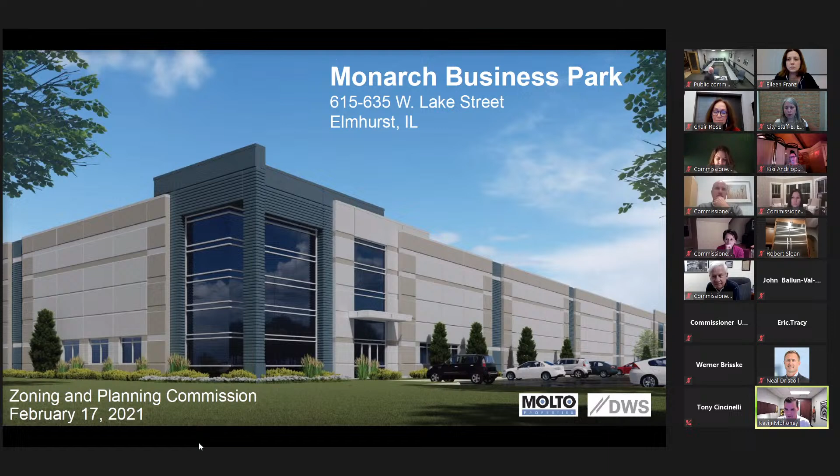All right, I know some of this is probably refreshed and you guys know the site pretty well, but just a quick overview of existing site conditions. This site is roughly 26 acres. It's right at the corner of Lake and Grand, currently zoned I-1 restricted industrial. It's really at the doorstep of the city's primary industrial district. Presently, it's home to a Caterpillar sales and service center.

It's owned by a company out of Iowa called Altorfer. Back in 2018, Altorfer announced plans to relocate this Elmhurst operation into 4 separate facilities in the greater metro area, and that's really what unlocked the development potential for this site. We've owned the property since acquiring it back in January of 2019. Since then, we've been leasing these facilities back to Altorfer as they finalize their relocation, which should be complete within the next 45 days or so.

Once they do vacate the site, we will commence demo of the existing facilities. We're also going to be performing a significant environmental cleanup to remove and/or clean some contaminated soils on site. All that is going to be under the guidance of a formal remediation plan that we've already had approved by the IEPA. Just a couple of general notes on timing: we would expect the vertical redevelopment to commence sometime later this spring, with a target completion of the development end of 2021 or early part of 2022.

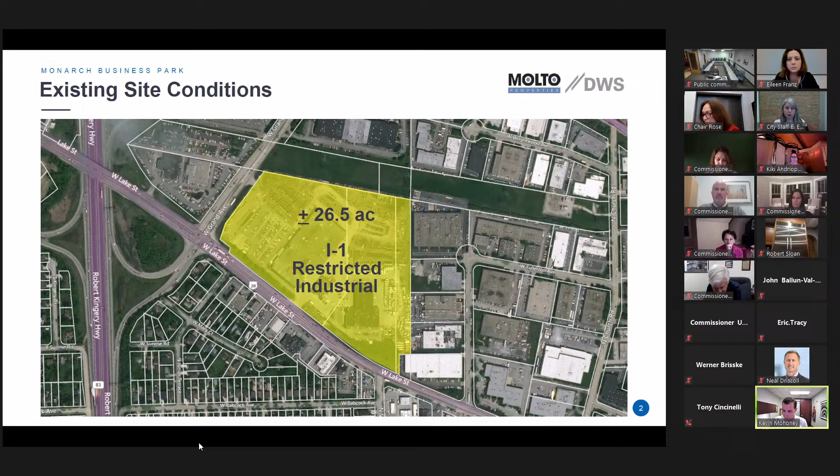Anytime we're looking at development, I think it's always helpful to view it within the context of the current market conditions. The reality is that we have a very healthy industrial market. Throughout this pandemic, industrial has proven to be a very resilient and very stable property type. The trends accelerated by the pandemic have only further strengthened our industry. From a macro level, Chicago in 2020 recorded a record number of new leases. When you look at the 1.3 billion square foot Chicago market, you've got a current vacancy rate of 6.7%, which is very healthy. As you drill further into the Chicago submarkets, areas like we have here in Elmhurst continue to be premier industrial locations.

They're highly attractive to tenants. You've got great access to interstates, proximity to the airport, and the relative tax benefits of a DuPage County address. Now, the challenge is that while these are highly desirable locations, they're also highly constrained with respect to new supply. You've got a lot of barriers to entry to developing in these areas.

When you specifically look at your community in Elmhurst, as of the end of last year, your vacancy rate for industrial properties was right about 4%. That would, without a doubt, place you as one of the top performing municipalities in all of Chicago. It's an impressive number, but it's also reflective of severe supply constraints. Ultimately, a lack of modern facilities is going to greatly inhibit the city's ability to attract, retain, and grow quality corporate tenants in the future. Our hope and belief is that this project will address some of those unmet needs and ultimately make the city more competitive in attracting new companies.

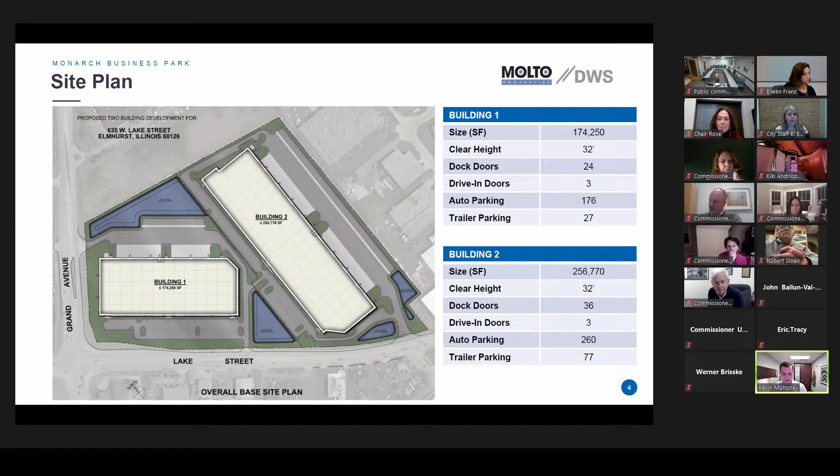Moving on to traffic and circulation, this is something we always spend a lot of time on during the design stage. It's always important to municipalities, and it's also important for good design because the ingress, egress, and circulation on these sites is meaningful to tenants.

When we looked at this site, we focused on three things we typically apply to most sites: limiting negative externalities to the existing roadway system, designing a layout that provides good ingress and egress to the site that's attractive to users especially in a spec scenario like this, and providing good on-site circulation that separates both auto and truck traffic, limiting potential conflicts between the two.

As we've talked about, this is a big site, so you've got a lot of design flexibility. But when it comes to access, we have a few more constraints we're dealing with — two different jurisdictions on the traffic side. Grand Avenue is under the jurisdiction of DuDOT, and Lake Street is under IDOT. So the access points you see here are reflective of our conversations, input, and ultimately approval from both of those entities.

Starting at the northwest corner, access point 1 along Grand. At present this is currently a full access point. As part of this proposed project, we'll be downgrading this to a three-quarter access point per DuDOT. Essentially this will allow a right into the site, a right out of the site, and a left into the site, but no left out of the site. As you can see, it essentially leads into the truck court, so this would primarily be the ingress point for trucks entering building 1.

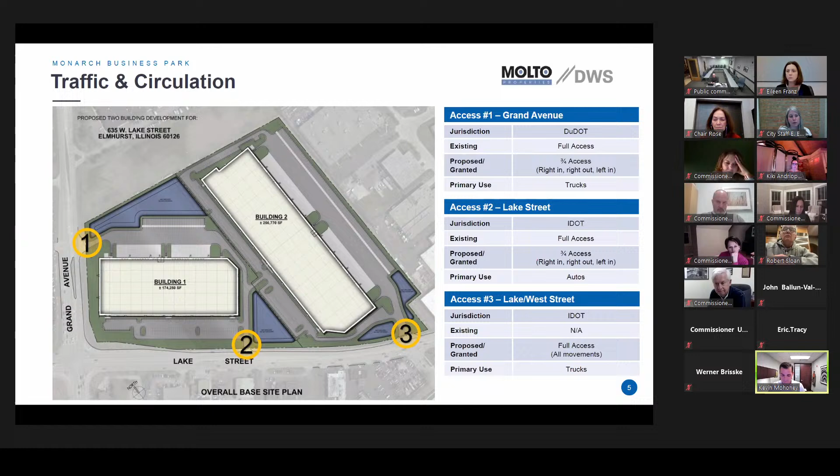A few quick notes on building and construction materials. These are modern industrial buildings, precast concrete, made of steel. You've got future office areas, as we talked about, on both corners, as well as a future center entrance. That's where you have more of the architectural details, with a higher image class entryway. We're incorporating a number of different architectural elements into these buildings.

That includes reveals in the precast. We're also doing some variation in paint scheme, all to make the buildings a little more architecturally unique and essentially to break them up.

We are also planning extensive landscaping throughout the site. That's certainly something we like to focus on, especially in a higher visibility site like this. We will be focusing those efforts along the Grand and Lake frontage. In general, I know the city doesn't have design guidelines presently, but we're pretty confident these buildings will be reflective of any future standards the city would implement.

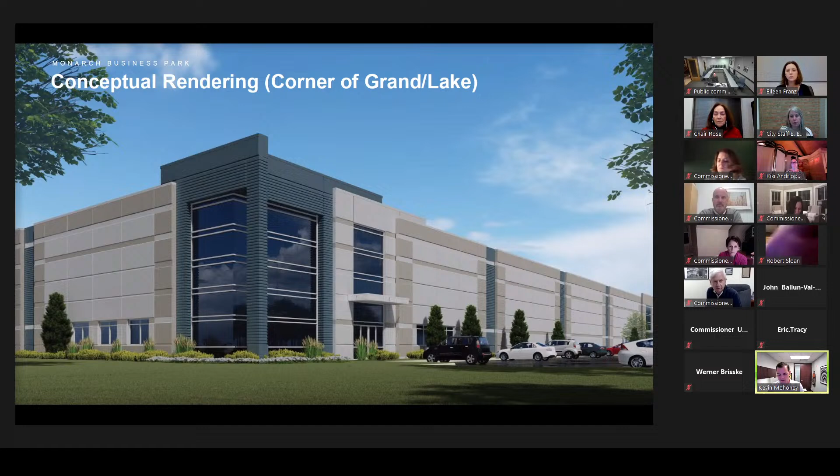In terms of loading, it's a standard mix of loading dock doors as well as drive-in doors. You can see we're incorporating a number of clerestory windows, which helps brighten up the warehouse space. It's something tenants consistently request, so we've started proactively putting these clerestory windows into our buildings.

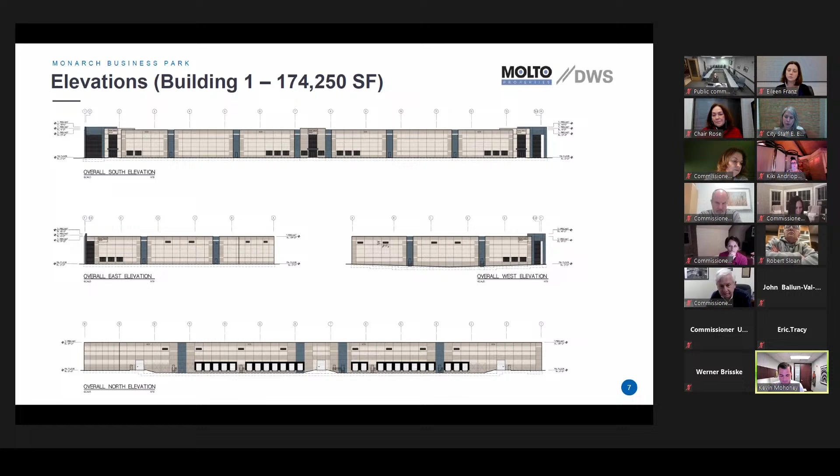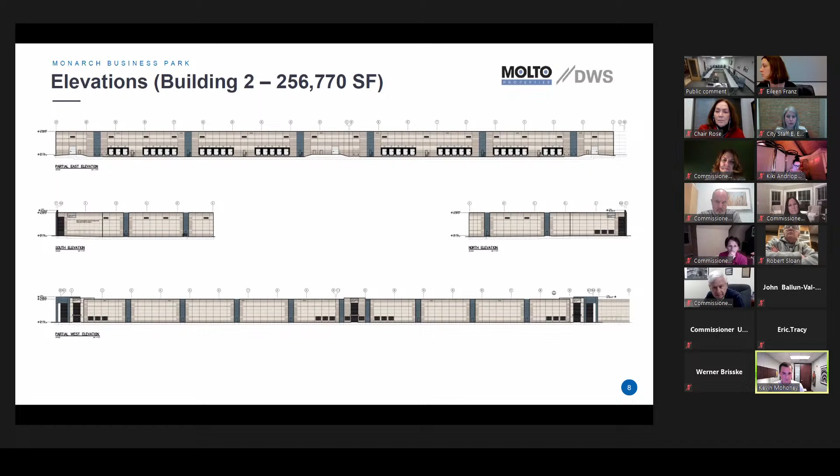In terms of standards of review, I know in our application we addressed each of these items. Thought it was worth touching on a few of these standards that we thought were most salient and important.

In terms of the conditional use standards, as it relates to the project's impact on surrounding property, what we're proposing here, as we discussed, is a modern business park. It's something that we believe is going to improve the existing streetscape, and we think ultimately it's going to encourage further redevelopment in the city's existing industrial district.

In terms of conformity with the city's comp plan, we believe it's consistent with a number of the key objectives in the comp plan, specifically as it relates to encouraging quality building design, creating economic prosperity for residents, and overall strengthening the city's industrial base.

And then finally, in terms of conformity to applicable regulations of the district, as was mentioned to lead off the meeting, we are not requesting any sort of site development allowances as part of this submittal.

And then moving over to the PUD standards, a few things worth highlighting. As we talked about traffic, we spent a lot of time designing this project to accommodate the safe movement of car, truck, and pedestrian traffic on site. We also have multiple points of ingress, egress for any sort of emergency vehicle access.

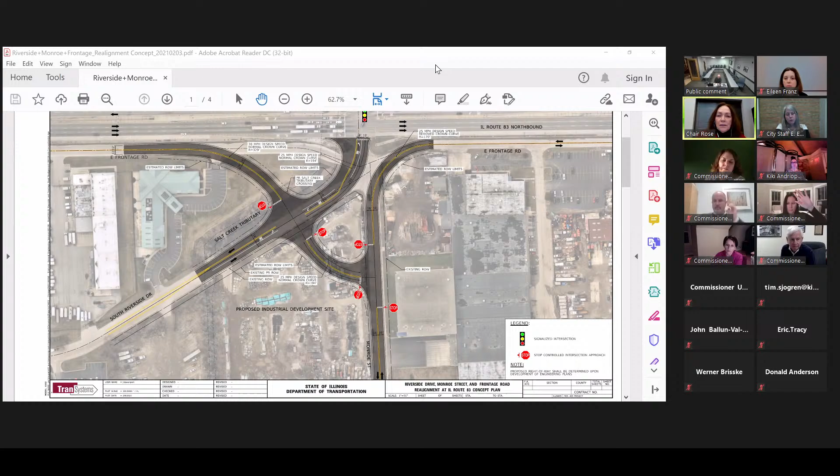I guess I just wanted to get some clarification on this conceptual plan and how it relates to what's being proposed tonight. Would there be any changes? It looks like a majority of what you're envisioning as a potential new interchange would be going through that detention basin, but it also seems like it might infringe on the footprint of what's being proposed in terms of the actual building. I do have an overlay of it with the building in place. It does not affect the building at all.

This is like the first time we met with this group. We said, hey, this is something we really want to do, and they worked with us on their design so that if there's ever a possibility to happen, it could happen. The only issue now is the stormwater detention. This area has been recently improved, and the FEMA flood elevations have changed recently, which has helped a lot, but there's still some stormwater detention issues—still some floodway and floodplain to the east, where before it was pretty much all floodplain and some floodway. So it's a matter of whether they can work out the engineering for the detention elsewhere, so this could just be open land for the future possibility. If not, then it's going to be a decision of whether we underground it at some point or do some kind of land swap to redo their detention if it can all work out.

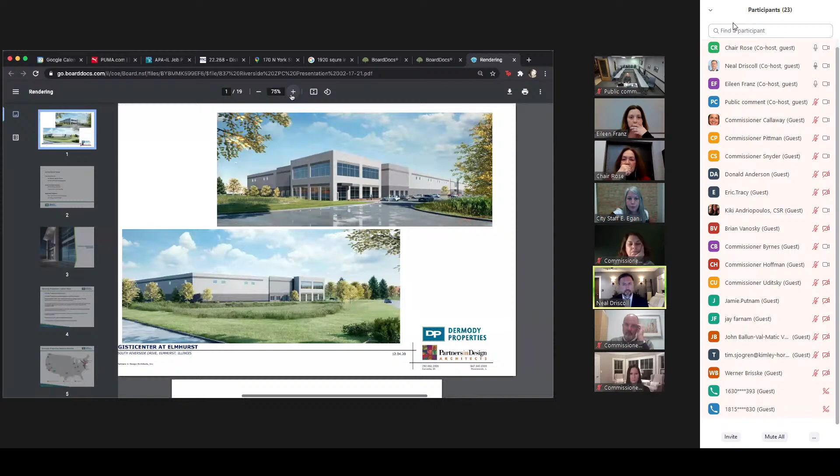We think this provides great benefit and opportunity for the city of Elmhurst as well. I won't go back and rehearse Kevin's really fantastic description of what's happening in industrial real estate in Chicago, but more specifically around the airport. I certainly agree with 100% of what he said. It's a great time to have opportunities like this to present to your community, particularly because I think there's so much residual value that Elmhurst will benefit from bringing these new buildings and therefore new companies into their community, just from the general patronage that all those employees create within Elmhurst.

Our first slide here is just two different rendering locations, just to give you a little bit of sense for what the quality of this future building will be. We at Dermody spent a lot of time really focused on the aesthetic component of this. We typically put a lot more glass on our buildings than others because, in our opinion, it elevates the image, but also that sense of ownership from our future tenant base. If you could flip the two, please.

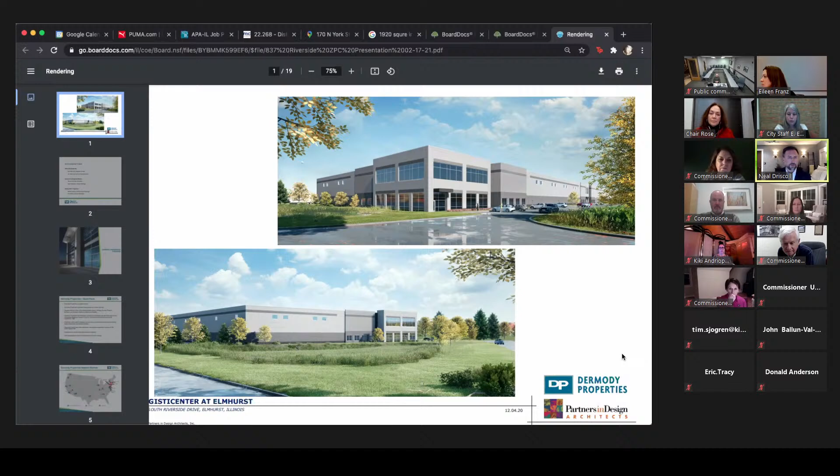Just to give a quick description of our project team. Again, my name is Neal Driscoll, and I'm the Midwest partner for Dermody. My senior project manager, Jim Nass, wasn't able to join us tonight because he's on a call for a project down in Reno. Our architectural partner is Partners in Design, Werner Brisske, who's on the call tonight. And from Kimley Horn, we have Jamie Putnam, Eric Tracy, as well as Tim Sjogren, all of whom were on the previous call. So just another parallel between the two, which is kind of fun, but certainly means they've got a good understanding of what's happening in Elmhurst.

If you jump forward again, please. Actually, maybe one more.

Just for a quick background on who Dermody Properties is as a company, we're a privately owned development company. We're actually based out of Reno, Nevada, but we've got headquarters here in Chicago, where I sit, where our president as well as our chief investment officer sit. We're essentially coast to coast and have a very robust development pipeline from the far northwest all the way through to the northeast. Next one, please.

There's just a description of all those markets that I mentioned, and then one more.

Here's just a quick graphic representation of some of the tenants that we either currently work with or have built buildings with in the past. A lot of household names that you all recognize, I'm sure.

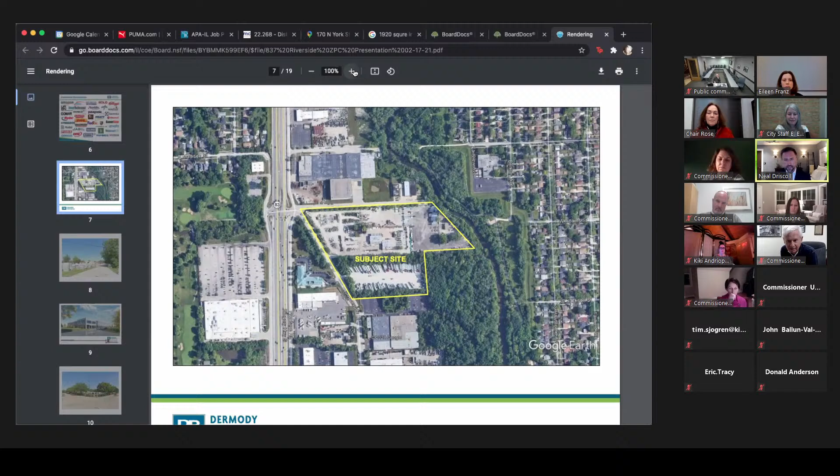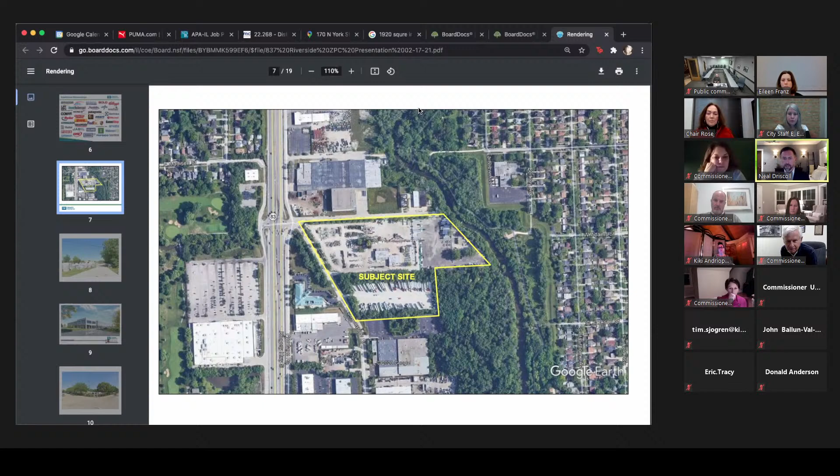I apologize for the clunkiness of not operating this myself. Here's an aerial of the subject site. It's actually bisected right where you see the word subject site by the creek that Mike referenced previously, and so it actually creates some pretty unique challenges as it relates to how you find a way to redevelop this site. Next one.

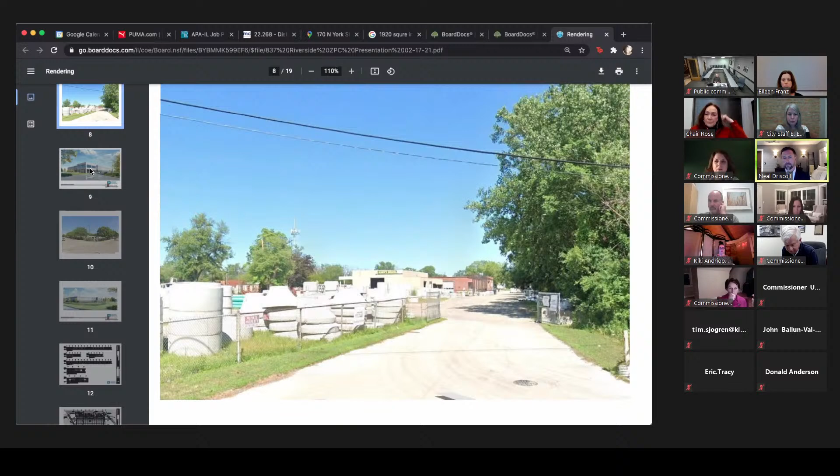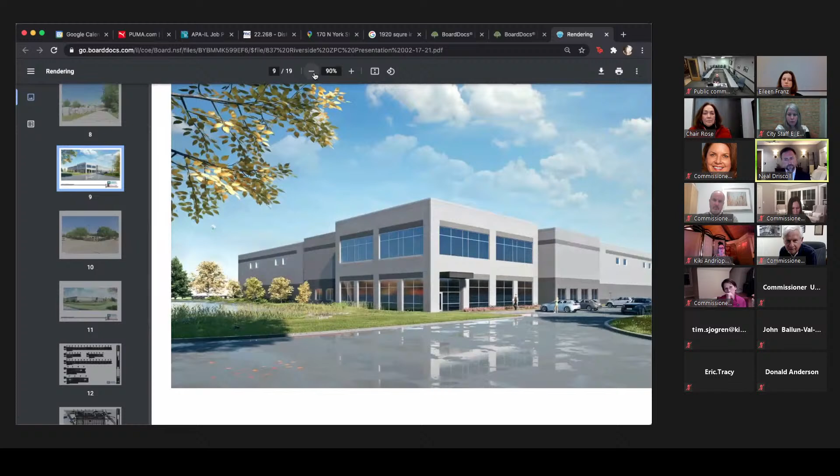Here's essentially a street side view of the current property. It's a concrete products sales location. There's also a handful of tenants who lease yard space on the current site. And if we flip to the next one, you'll see an elevation of that future view from Riverside Drive.

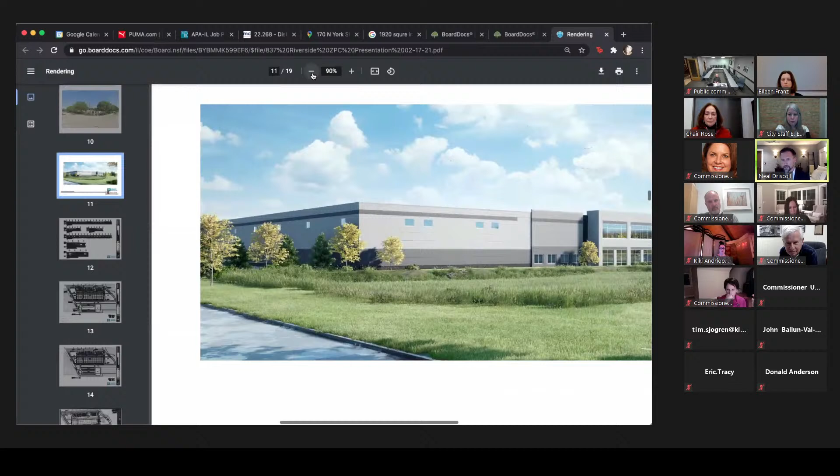The next one will show you what that rendering and elevation will look like in the future. This also shows the compensatory storage pond we were talking about previously. As Mike and Eileen both mentioned, this is something we created in the beginning when we talked about setting the building back far enough to help accommodate the alignment in the future. We've now, through communications, taken that a step further to suggest that not only will we commit to conveying this land over to Elmhurst to make this reconfiguration, but we will likely relocate some of that compensatory storage now so that we all can save the short and long-term cost of that relocation when the road alignment comes through.

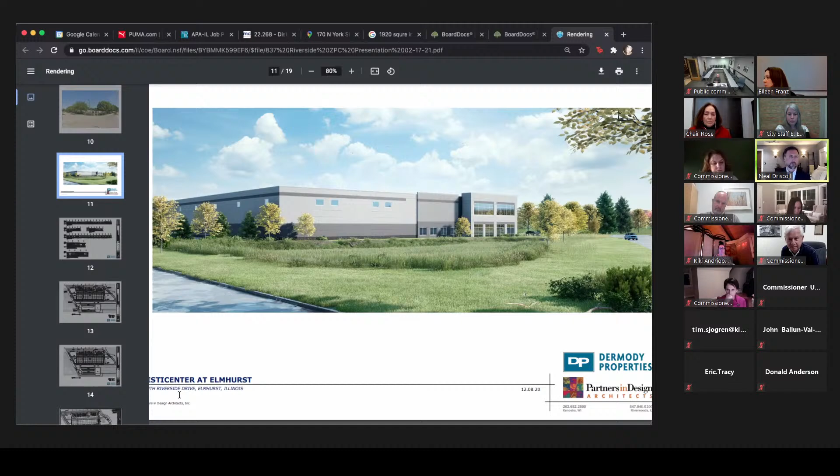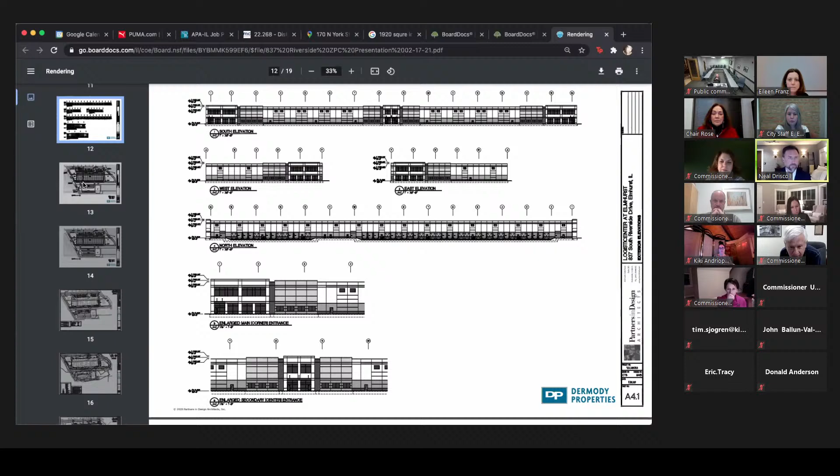The plan is to create 2 bridges that'll cross over for pedestrian as well as car traffic, not for truck traffic at all. We're really excited about this. We've got a facade with a lot of glass that gives a quasi-office feel to it, and we're very confident that creating these bridges over the creek is also going to create a really interesting corporate feel to this industrial building, which we're pretty excited about.

Just to the south, you'll see we've got a small lot for our tenants to park their trailers. The concept is, because this site is rather condensed in its depth due to the creek, there's really no way to accommodate what modern industrial tenants typically look for, which is a handful of trailers that can complement their docks to allow for the transition between empty and full trailers as they move inventory in and out of their warehouse. So we're accomplishing that by putting it to the south of the building.

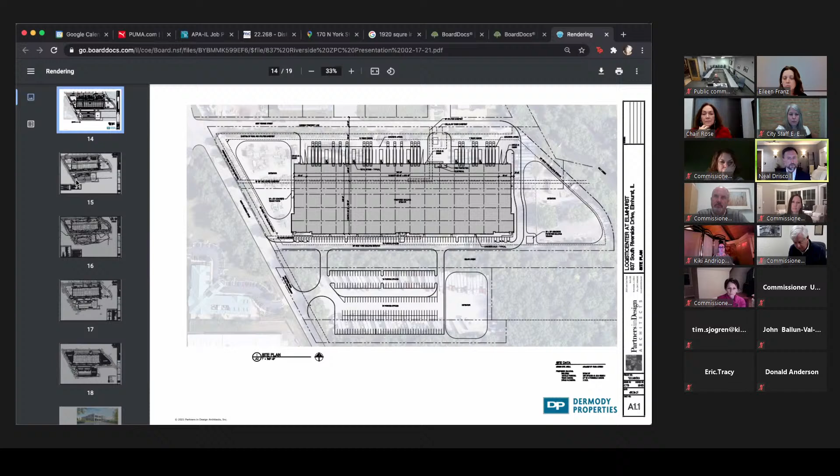These next drawings get a little bit granular in their detail, so I won't go into too much of that unless there are particular questions we hit now or at the end. This essentially is just a plan that shows our pavement surfaces. One thing I failed to mention before, we're very concerned about the potential conflicts between cars and trucks, and so those bridges are designed only for car traffic and pedestrian traffic.

We've got a very hard turn essentially from the bridges crossing over to the north, so tractor trailers know they can't try to make a right turn and loop around to Monroe Street. They'll use the access points off of Riverside to move those empty trailers back and forth, just to minimize any safety concerns that might arise.

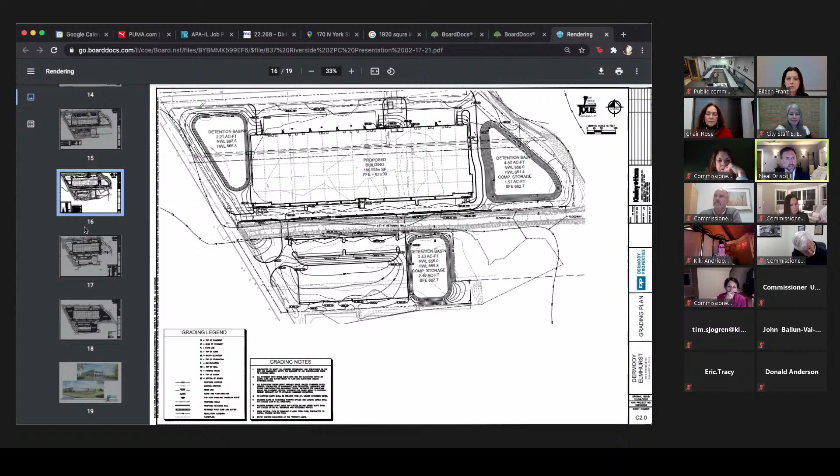This is simply a grading plan. I don't think there's a ton to talk about here unless anyone wants to geek out with any of the engineering details, but that's why I've got Jamie and Eric on the phone if we want to answer any of those.

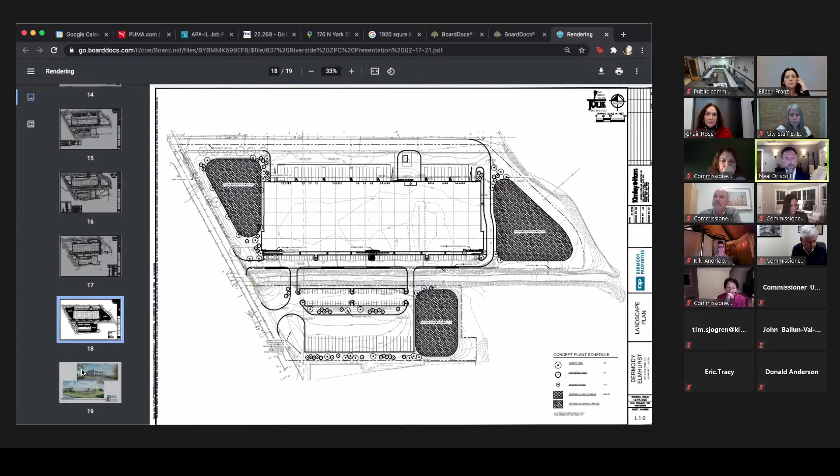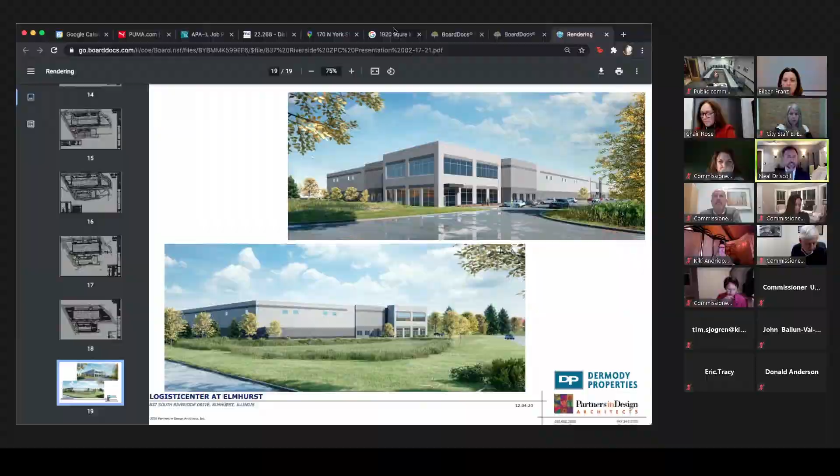And finally, back to the elevations. I thought I would take a few minutes to go through the conditional use standards as well as the PUD standards. I won't hit every single one as they're a bit redundant here and there, but I want to hit on the highlights, particularly understanding how important and concerning the potential traffic issues are for the existing neighbors. Regarding the standards of conditional use...

The future development will have a very positive impact on the neighboring properties in terms of its use, but also valuation. The building and car parking have been set back substantially nearest the interchange of Monroe and Riverside, as I mentioned, to accommodate that future alignment.

Additionally, currently to the south of the creek, we've heard issues from staff that the existing gravel lot, which is really used for trailer storage, has created traffic as well as road maintenance concerns. In the future plan, we're actually reducing the size of that gravel area by almost half and instead paving it. So I think from both the traffic as well as a maintenance standpoint, it's going to be dramatically improved.

Our project is going to deliver, as you saw in those drawings, a Class A industrial building that I think will attract very complementary businesses to the area and to the community of Elmhurst. All the necessary infrastructure exists in place to service the future facility and will not create any additional demand on the city of Elmhurst. Additionally, the future development meets the objectives of the comp plan. And finally, the plan development complies with the applicable regulations in the industrial district. So we feel highly confident that what we're presenting aligns very well with what Elmhurst wants to see in this area.